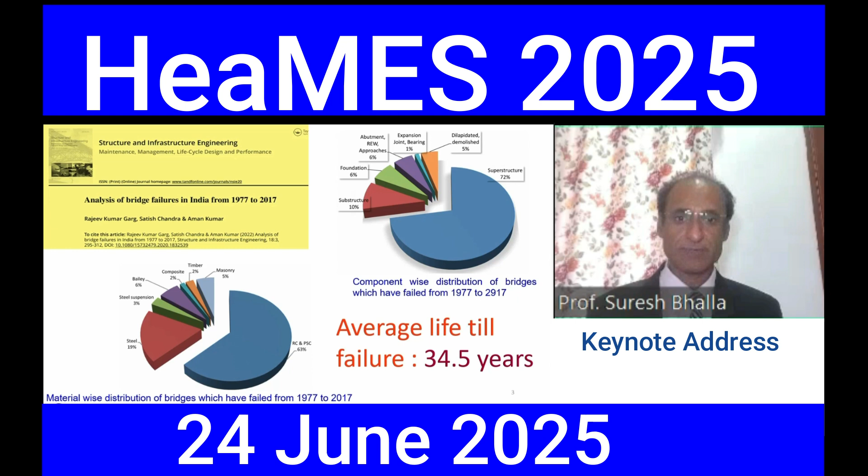So every now and then we see failures happening in India. And the year 2024 was quite a bad year. At least 15 bridges collapsed on our national highways, 11 collapsed while under construction, and 4 collapsed under operation. So what is the reason for this kind of localized happening? Because at least 12 of these happened in the state of Bihar alone.

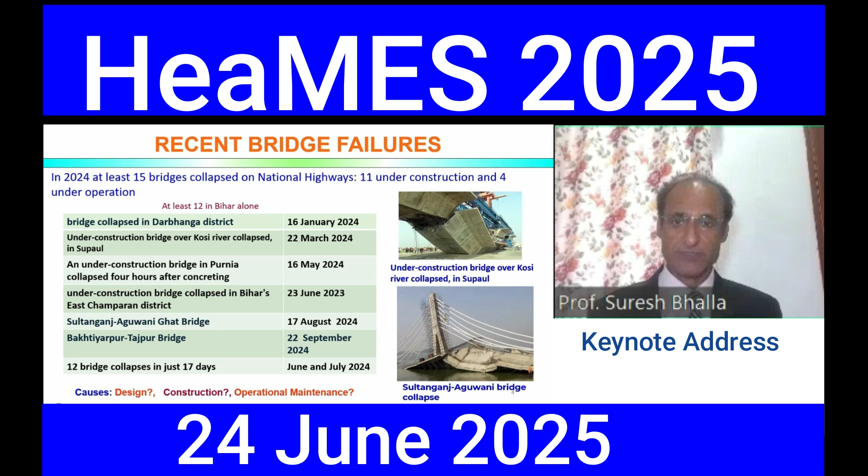Whether it's a design issue or construction standards, or in the case of running operational bridges, is it an operational maintenance problem? Many of these things here in our country are not very transparently discussed, and often these things are generally buried. So that is the situation I am talking about.

So here are the typical issues with developing nations, India in particular. We face the problems of bureaucracy. In general, among the government bodies, government officials, and even the engineers, the understanding of structural health monitoring is very poor. The accountability is often not pinpointed; it's very difficult to pinpoint the accountability. Then there is a high reluctance to update skills and adopt new technologies.

If there is decision making, it's abruptly taken at the higher level without participation of the ground engineers and personnel who are actually involved in the process of maintenance. Then even if it's decided to implement SHM, the approach is half-hearted. That is, there is always inconsistency in implementing the SHM solutions.

So here there are misconceptions. Misconception number one is that it's thought by authorities that our infrastructure is new, our building is new, so it does not require any structural health monitoring. So we can just take it for granted.

However, even if the structure is new, it's very important that we perform tests and some basic instrumentation on the infrastructure, whether it's building or bridge, so that we can map the parameters of the building and the bridge, and we can correlate with the design parameters. So that's why baseline is very important.

Once we have the baseline, we can always make decisions about what's happening in the building. If the stiffness and if the building is undergoing any loss, any structural loss, we'll be able to correlate very well. But if we don't have the baseline measurements, then after 10 years something happens, we are in dark. We are not able to tell related to the original making of the structure.

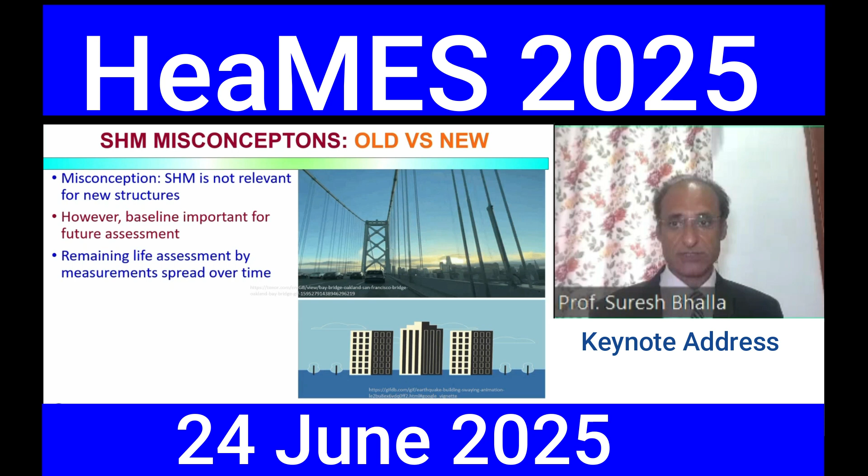So here the problem is that the authorities, they wake up very late when there are visible signs, and when there are visible signs, often they find an alibi, and that is they shoot out a letter for structure audit. So here in India, structure audit is the buzzword. They think this is something which can solve their problems. They have no idea about structural health monitoring, how it's different from audit, and what additional information or greater information structural health monitoring can bring.

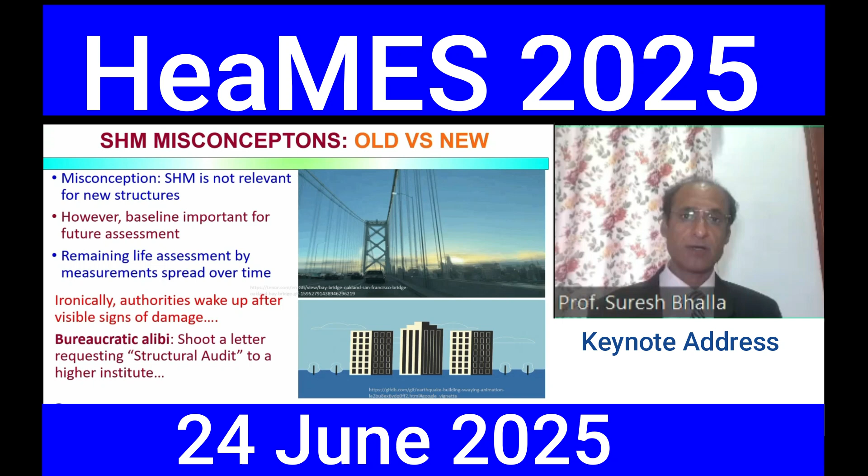So this alibi works often because the authorities, they find something happening, some media coverage, they immediately shoot out a letter, and then they get excused that we have written to this and this higher authority, higher educational body, and it's up to them. We are waiting for response. So that's the normal way the things happen here.

So thing is that the economy is growing, and our union budget has earmarked over 140 billion US dollars for infrastructure. So this is only the government budget. Now there are the private players also who are also doing infrastructure projects, private bodies. So we can now understand the accelerated manner in which the infrastructure sector is booming in India.

Now, to ensure longevity, uninterrupted performance, minimal downtime, and resilience, it's very important that these must be monitored by using the advanced SHM technologies. So here another irony is that the government and the bodies, they often install SHM systems, and there is no dearth of the number of such systems which have been installed, but they are just lying as they are, not utilized.

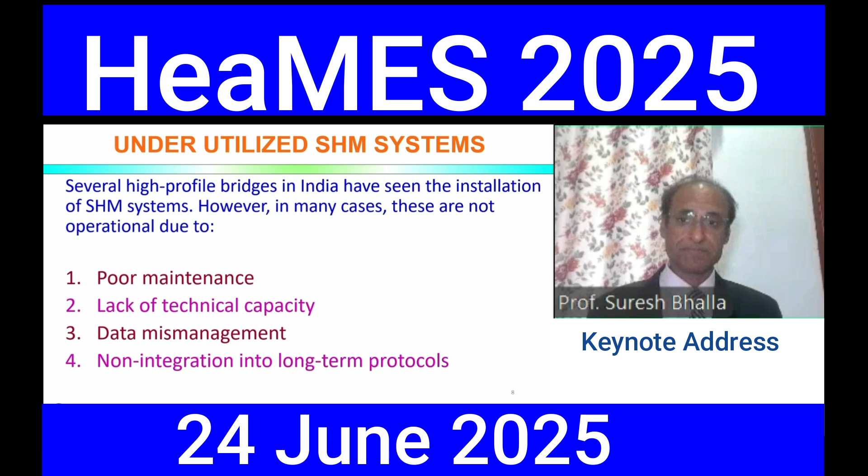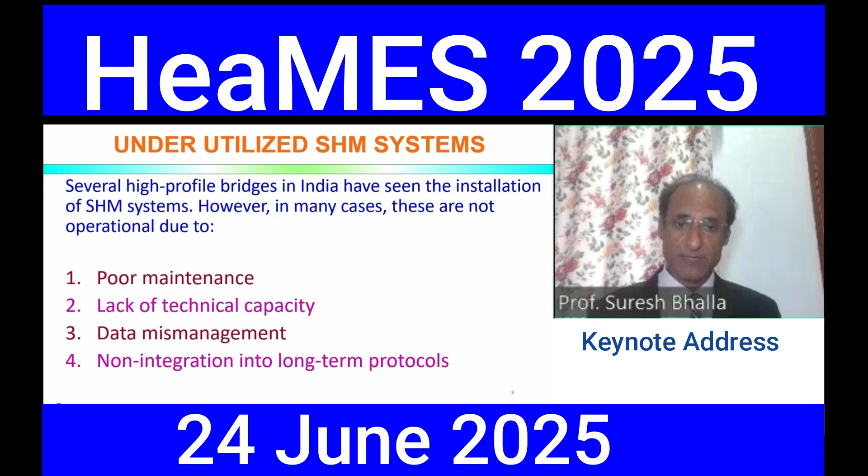They are not able to give the desired results, either due to poor maintenance, lack of any technical capacity, mismanagement, or the things have been installed, they have been handed over, but the authorities, their technical team, they have not learned and they have not integrated them in their long-term protocols.

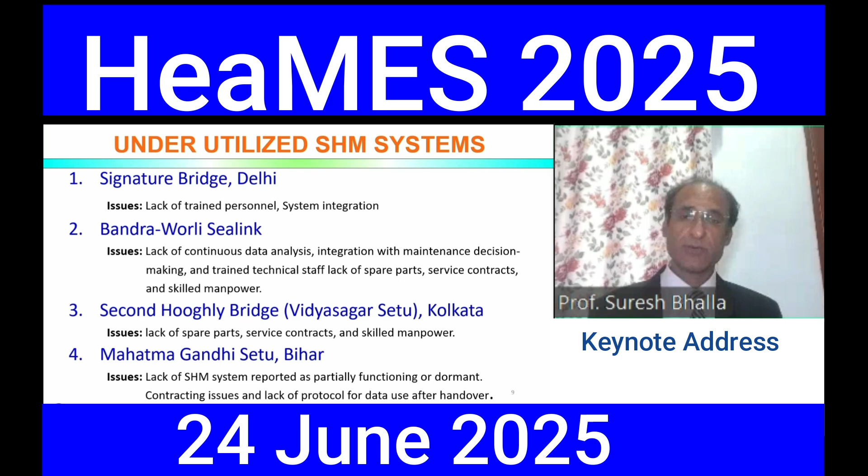So if we just do a survey, we find a number of such structures in India where the SHM systems have been installed, but they are not being utilized, either due to lack of trained personnel, or lack of integration, or lack of skilled manpower, or lack of spare parts, or lack of any proper service contracts. So there is no dearth of such projects where huge amounts of money have been invested in SHM systems, but they have not been utilized.

So here, as part of our Smart Structures and Dynamics Lab and the Indian Structural Health Monitoring Society, our motive is to educate and inform the stakeholders that structural health monitoring is not a rocket science, and we can have simple solutions which are pragmatic in nature.

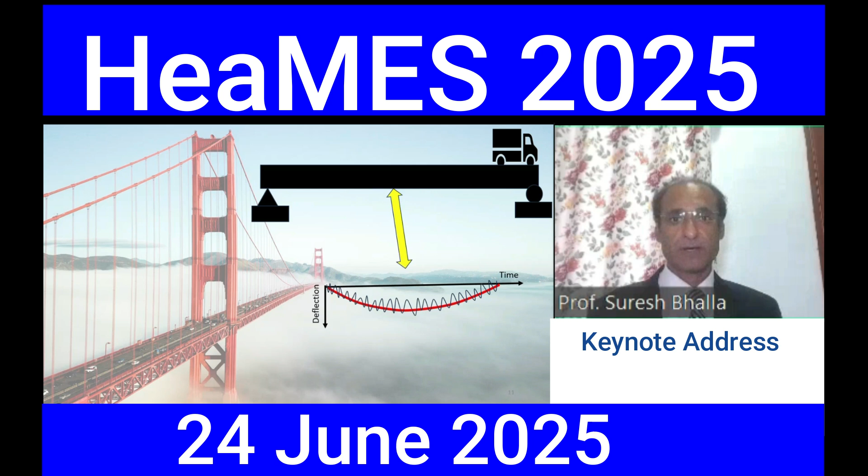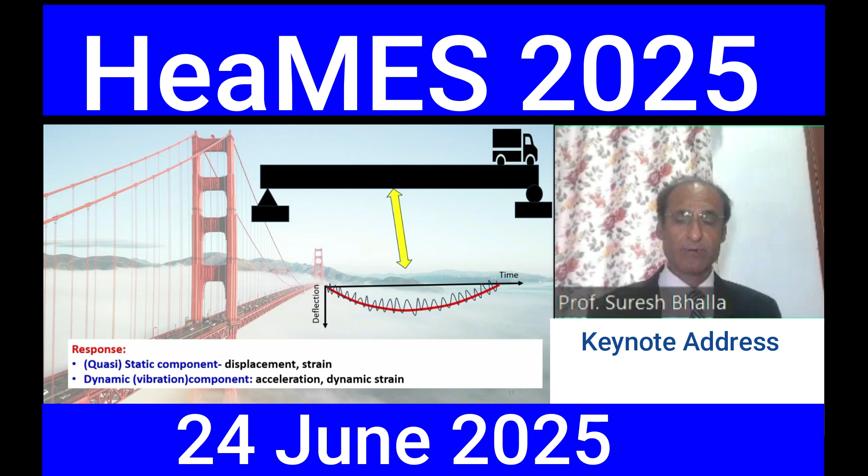So when we talk of monitoring, whether it's a bridge or a building structure, typically we need to monitor the static response, and we have to monitor the dynamic response. Both of them are quite important. Static response could be in form of displacement, in form of strain, and the dynamic response could be in the form of, say, acceleration. So my personal learning from the different number of projects is that strain, whether it is a static strain or dynamic strain, offers a very simple parameter from where we can extract the features necessary for taking decisions about the condition of the structure.

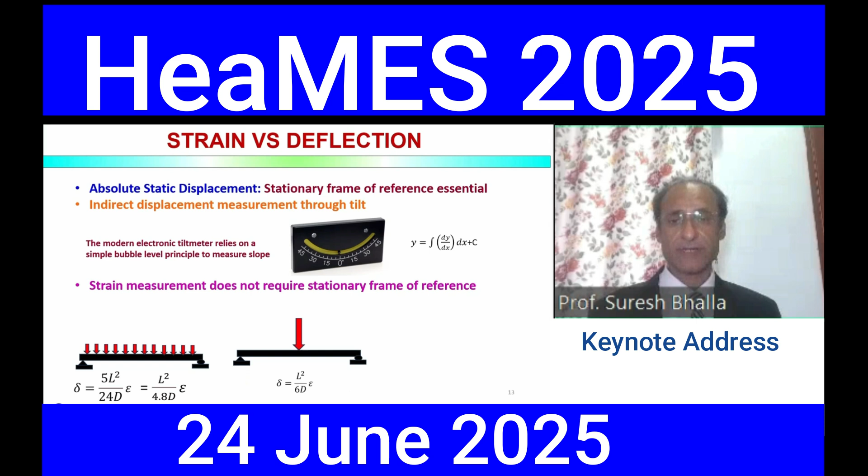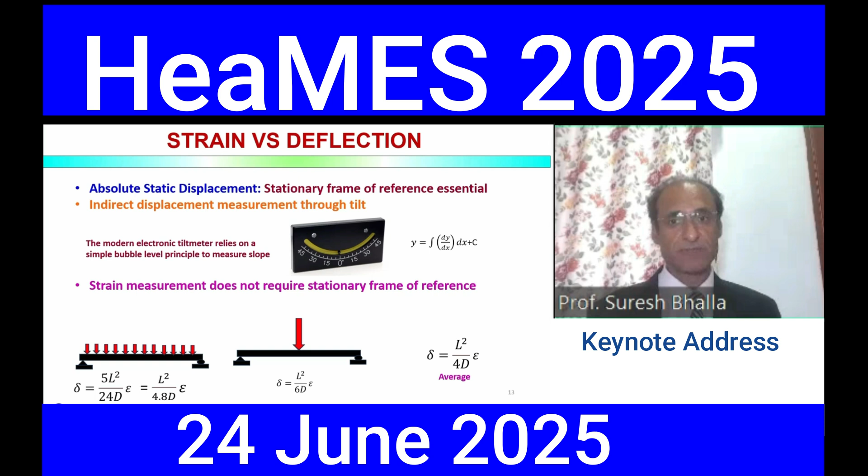So when we say strain versus deflection, it's always the strain which has an edge, because absolute displacement in real life scenarios cannot be measured. So we have to either rely on tilt measurement, but better than tilt is of course strain measurement, because if we have the strain measurement, we can always correlate it with deflection also, and this is something we utilize as a very simple way for obtaining the operational performance check, and also for long-term stiffness assessment by dynamic measurements.

So here for dynamic measurements, we have proposed piezo sensors as an effective replacement for accelerometers, which are very expensive gadgets for developing countries, and they are also fragile in nature. So with piezo sensors, we have shown through practical examples that it's possible to carry out operational modal analysis and obtain sufficient data which can be correlated with the stiffness of the structure.

So here, for first level diagnosis, we use the static strain, but for deeper feature extraction, we must do modal or stiffness related parameter checks, and for that purpose we can use either piezo sensors or similar gadgets. So in this particular bridge, we used accelerometers, and using the data from the accelerometers, we came to know that the apparently distressed span's stiffness is just 65% of the apparently good condition span. So this helped in taking a proper decision.

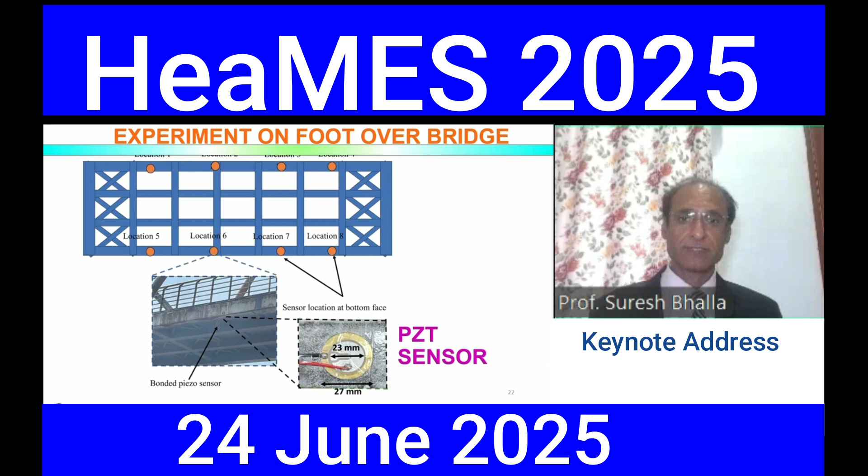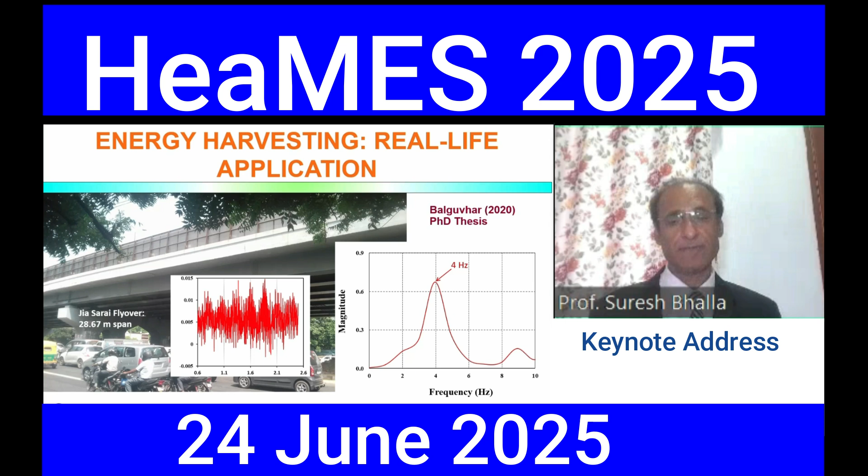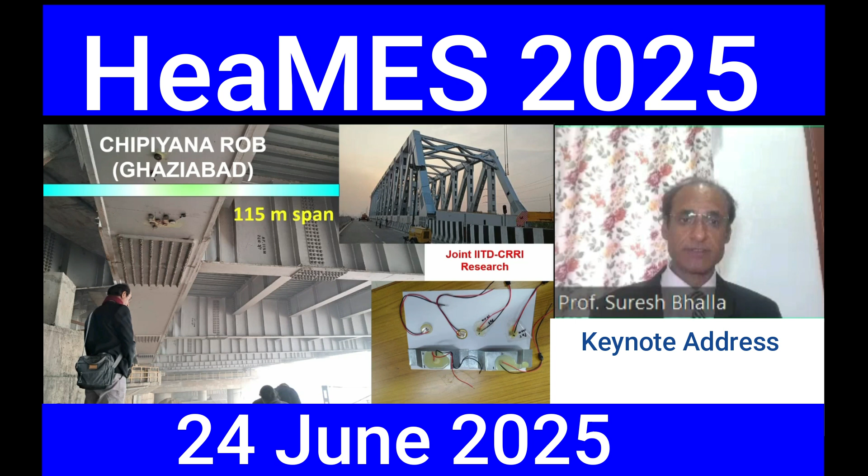And this is another bridge just opposite to our institute, where we used both piezo sensors and accelerometers, and we could do a study involving frequency measurement and energy harvesting. And here this is a joint study done by IIT Delhi and Central Road Research Institute on this 115-meter steel bridge. So here we installed piezo sensors, including a novel design which gives us amplified strains, so it can capture very low strains also. And just under the running traffic, we measured the dynamic strain response, and we could very easily correlate it with the modes of the structure.

So I teach the subject of structural health monitoring, and in 2024 I took my class for some basic measurements on this same bridge. And in 2025 we came with a more ambitious target: let's obtain the first mode shape of the main girder. So we can see here, these are the piezo sensors which are bonded on the side face of the main girder near the top, and this is how they look. By inserting our hand, we bonded them one day before, and this 1-minute video clip shows how we carried out the measurement of the baseline mode shape of the bridge.

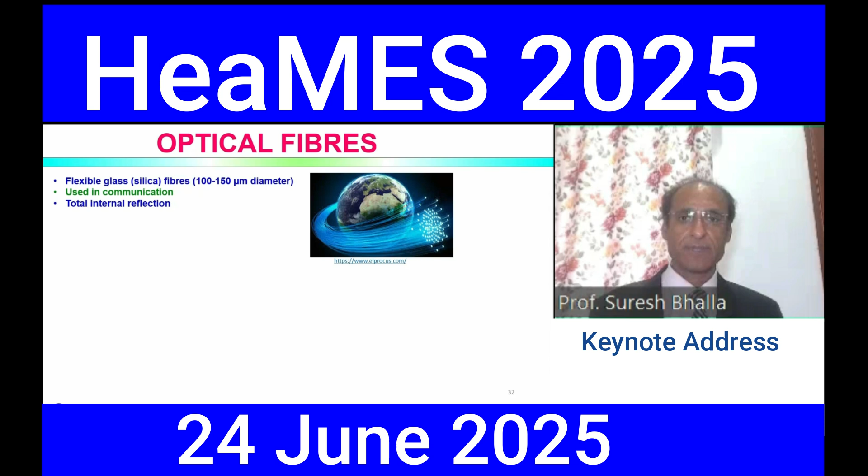So basically now other candidate technologies which could be useful in the Indian context or for the developing countries are the optical fibers, especially the FBG or the fiber Bragg grating sensors, where they use the principle of the gratings, which act as basically filters. So they filter out a particular frequency, and most of the other light is transmitted, and this serves as the measurement of the corresponding strain which is coming on the structure. So this particular wavelength is the Bragg wavelength.

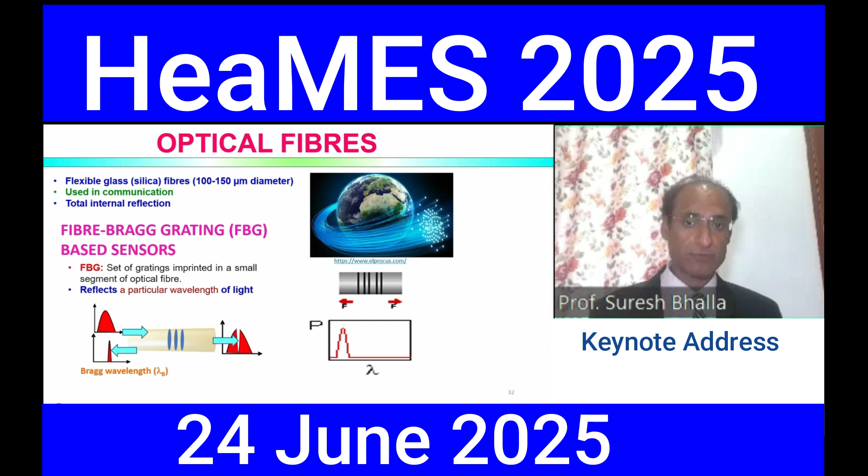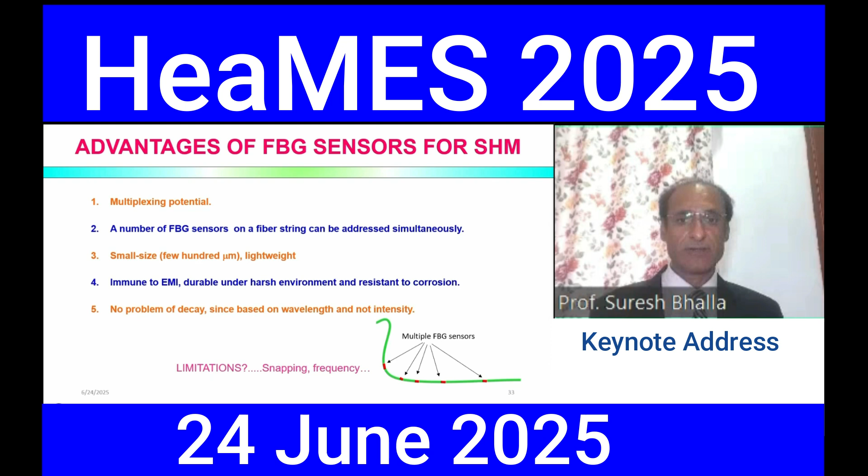So this is a very promising technology because it has multiplexing potential, it has small size, the sensors are non-reactive, it's immune to electromagnetic interference, and there is no problem of decay because our measurements are based on wavelength and not intensity. And now there are solutions, very good high quality FBG sensors are there, which are not easy to get snapped.

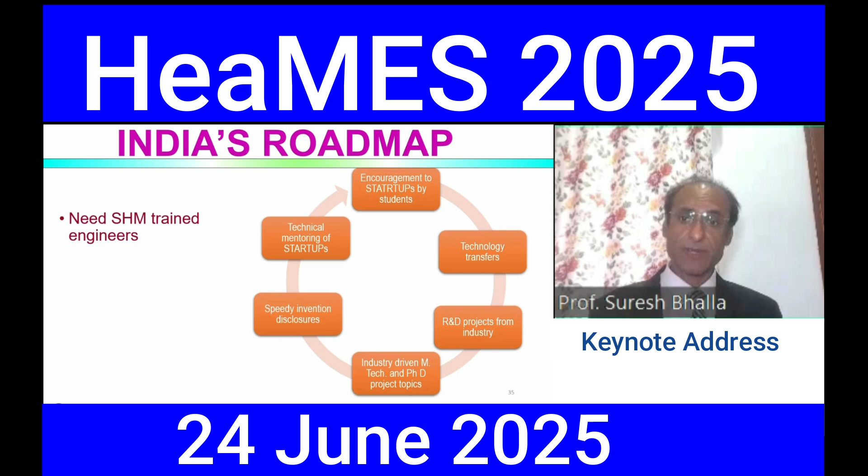So when we say what is required for the developing countries is we need trained manpower, we need industry academic joint research, we need an ecosystem where different stakeholders can come together, and we need policy from the point of the government. And it is in this direction that we have formed the Indian Structural Health Monitoring Society to propagate the agenda and the importance of structural health monitoring here in South Asia. So its aim is to act as a catalyst for the development and implementation of SHM and related technologies, to form an ecosystem, to promote awareness and capacity building about SHM, to promote the dissemination of the state of art in SHM, to represent the SHM profession in India and abroad.